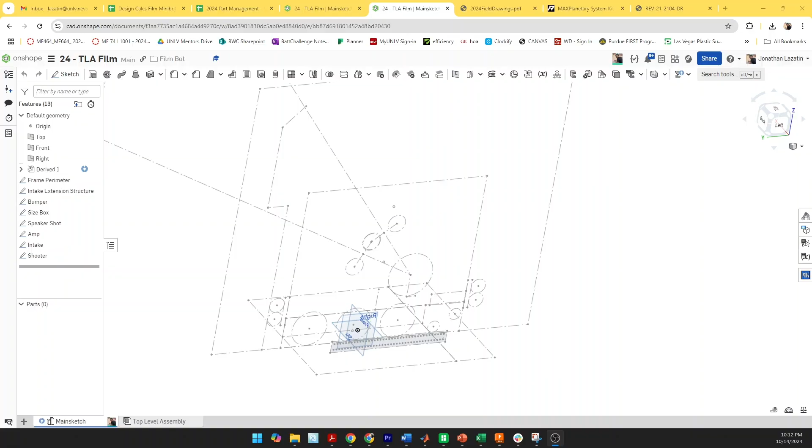Alright, so we're going to start doing mechanism design specifically for the shooter subsystem now. It's going to be an arm shooter. If you remember, we had that circle design for the sprocket.

I'm going to create a new document in my folder called 24C arm. B I'm going to reserve for bumper, so I'm going to move up to C for my subsystem.

Now once that's loaded, I'm going to start deriving the sketches from both my main sketch and the drive sketch stuff that I need. First, I'm going to go into my folder for Minibot design, and then the special film one that I created. I'm going to go into the drive.

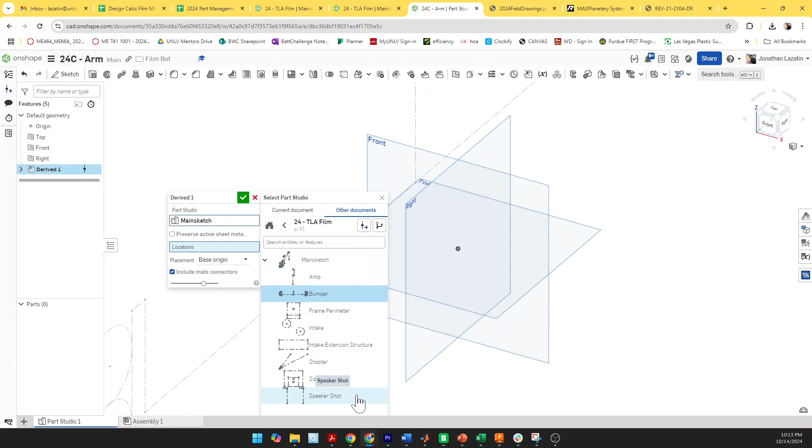I have to create a new version of it, and so I'm going to look for the sketches for the bumpers and the shooter and the size box, because those will kind of be important to the part that I'm looking at.

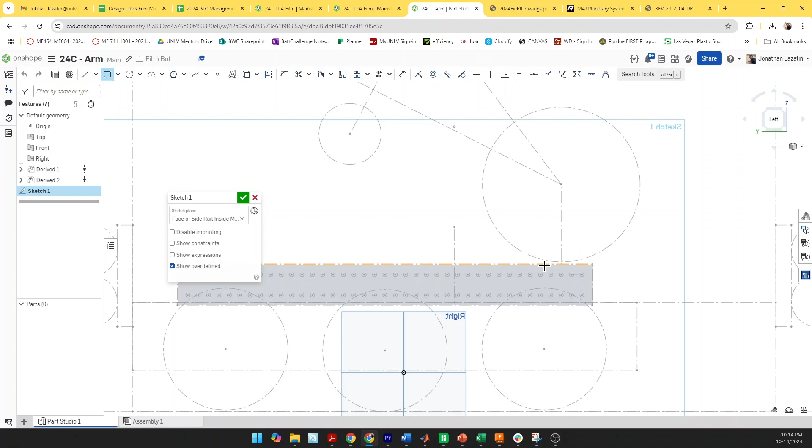Alright, so now I have my mounting rail position here. This is the inside of the mounting rail. So I'm going to do a sketch on that plane. I'm going to create a tube that centers on this pivot point that I have for my shooter.

So I'm going to make that equal so that it is also 2 inches. I'm going to look for the center mark of this rectangle, and I'm going to make that incident to the center line that I have for my pivot point. This is my pivot point here.

And I want this distance to be about, I want to have like at least an inch away from the pivot point, so I have enough material for the hole that's going to be there for the dead axle. Let's look at this height real quick - it's actually just under 5 inches.

So actually what I'm going to do is I am going to just measure the height to be 5 inches. That way this whole pattern offset will be kind of like a normal offset. So I got that, that's 5 inches.

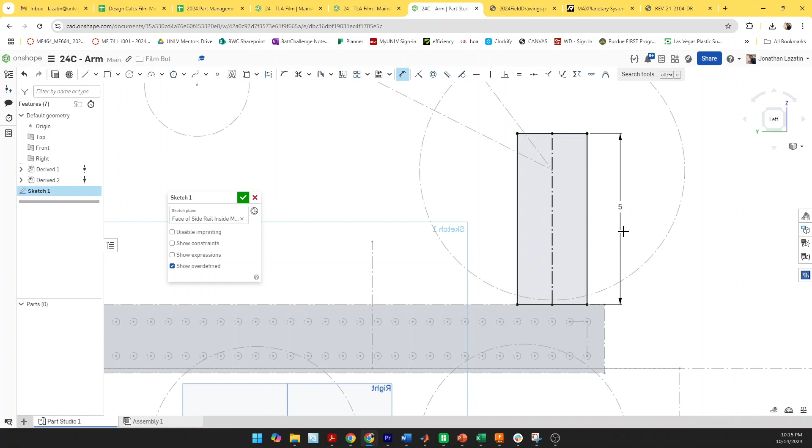And then I'm going to create a hole exactly where this pivot point is going to live. When I machine this, I'm not going to actually care too much how big this hole is. It just needs to be big enough to fit the fastener that's going to hold the shaft. So I'm going to make this something like 0.5 inches.

Okay, now I got my sketch. I'm going to go ahead and extrude that. And then I look at it - it's going the wrong way, so I'm going to flip it to go above the tube.

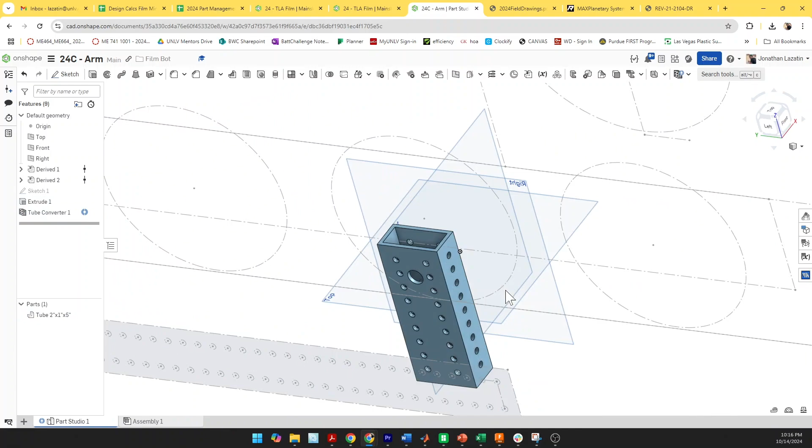And then I'm going to use my tube converter tool to make that into a regular hole patterned tube. So now I have my hole pattern.

Next, I'm going to design a gusset that holds this tube to the side rails that are mounted on top of the drivetrain. So I'm going to select this face, and then I'm going to make a sketch on it, and then I'm going to do a couple of different hole patterns.

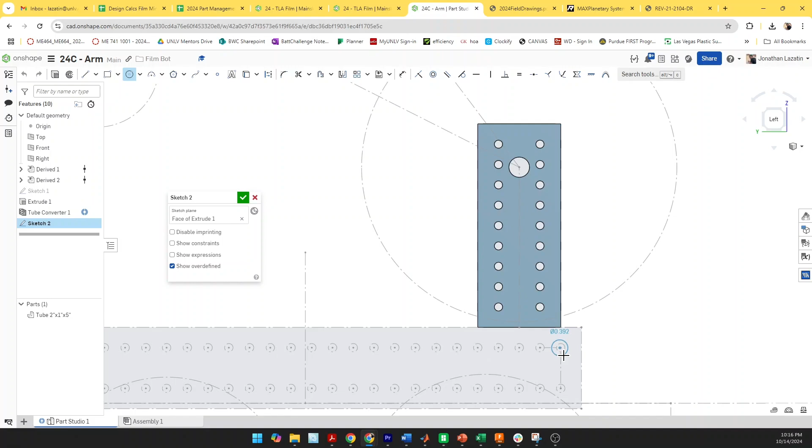I'm going to do one at the bottom that's going to start at this bottom corner, and I'm going to do another one at the corner of the vertical tube. I'm going to hole pattern this so it goes 2 across and 4 up. Change that to 0.5 so it matches my spacing.

And on this one, I'm going to go to the left, and we'll go about, I think it's 7 across. Change this spacing to 0.5 as well. Oh, not 35. And then this direction we're going to go 2.

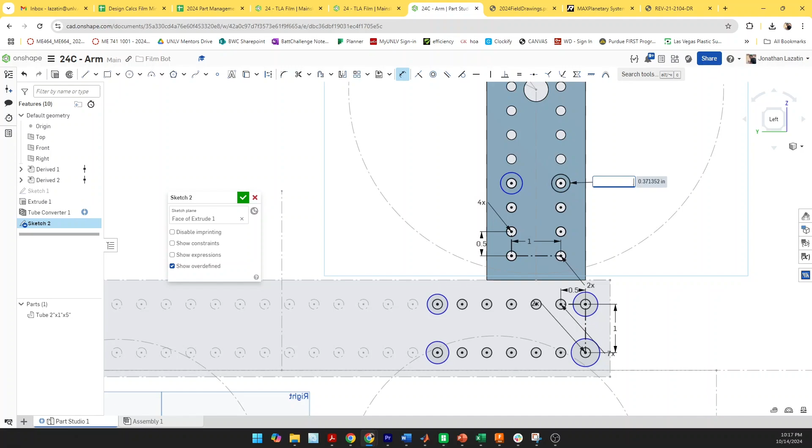Now I'm going to create the corners of my gusset, so I am going to create circles at each of the corners. Now I want all these to be 0.75 inches, so I'm going to dimension one to 0.75. And then what I'm going to do is select all of them so they highlight orange, so they're all selected. Then I'm going to press E for equality, and that's going to force them all to be equal to each other, applying the equality constraint to all of them.

Next, I'm going to create a bunch of lines that touch each of the outer circles here to create the profile of my gusset, using tangent constraints to lock in all of the lines so that they are just touching those circles at one point. Let's try that again.

And sometimes when you're going fast, it locks in additional constraints that you don't mean to, so you just Control Z a couple times, back up, and then try again.

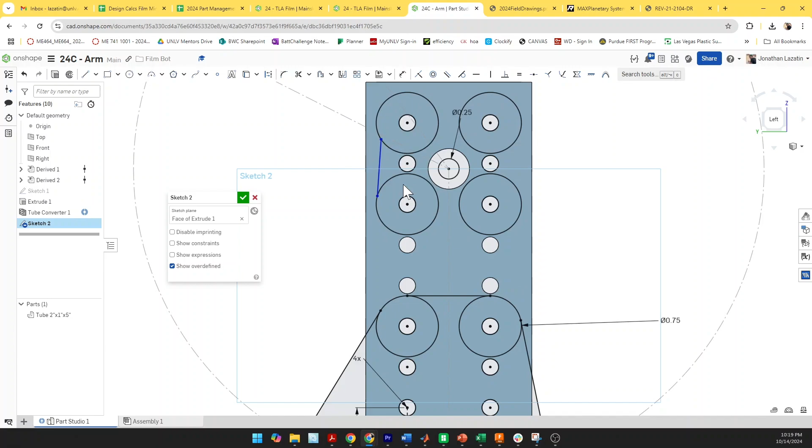Now I'm going to create a gusset, or a plate, that centers the hole here. Because we get the tubes and pattern holes done by the mechanical engineering shops, I don't typically like to ask them to do custom holes in random spots. So what I'll do is design a plate that mounts to the side of the tube to get my precise hole position, which we can do in-house on the OMIO. I'll drill a hole like the large one in the center by hand on the drill press, just to allow enough room for a pass-through so I can use the plate as my actual centering hole.

Same gusset design philosophy here: do all of my hole pattern, my corner holes for the exterior of the gusset, then use lines and tangent constraints to make all of that hit at one place at each of the circles. Both of these are going to be 1/4 inch gusset plates.

So I extrude them to a 1/4 inch, and now I have my gussets. This is actually for the arm pivoting position, and this is kind of all I need. I'm going to go ahead and rename my part studio and my assembly to my naming convention: 24C arm, and then arm assemb for assembly.

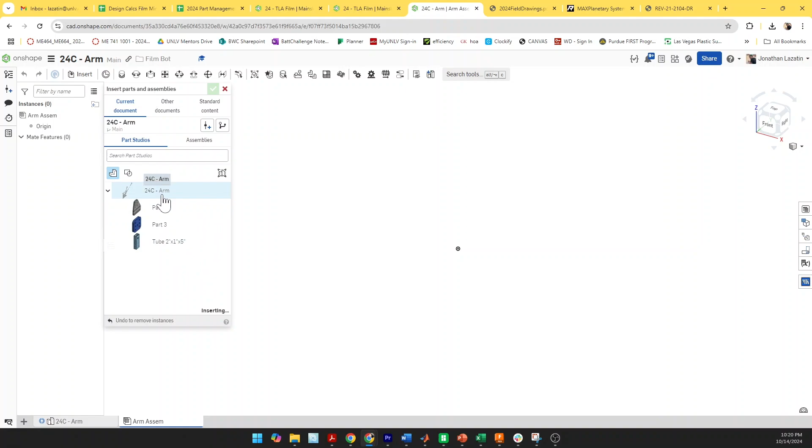Now I'm going to go to the assembly and drop in the parts that I currently have to start creating my arm assembly. So I'm going to drop in all the parts, and if I press the green check mark and not drag around the screen, it'll drop it in exactly where it is in the part studio.

So what I'm going to do then is lock these two together by grouping them. This blue plate I actually want to be on the inside of my assembly, so I'm going to move that to the other side. Next, I know that from interior to interior of the mounting rails on the side of the drivetrain is 22.5 inches.

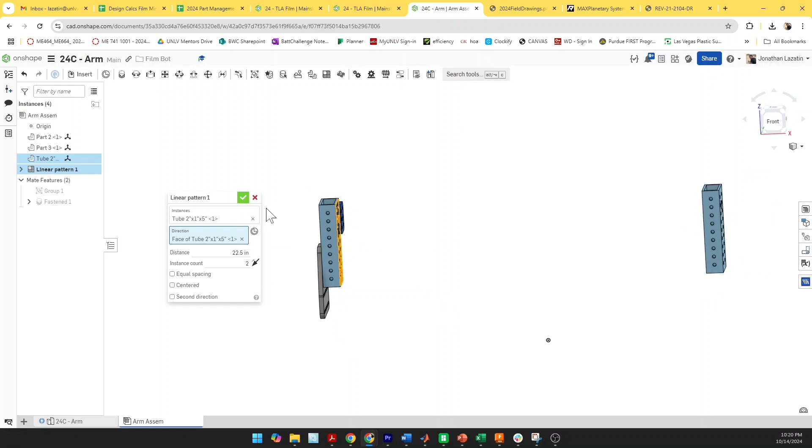So I'm going to use a linear pattern here to move these to about 22.5 so that they match that dimension. I'll put 22.5 here to see where it's at. This isn't exact—it'll be a bit more than that based on the tube width—but instead of doing the math, I'm just going to drop it in first, look how far apart it is, and then adjust.

So these are 21.5, so I'm going to add an inch to this, so it's 23.5. Now it should be 22.5 on the interior face, which matches the drivetrain. Then I'm going to copy this over so I can mount it on the other side as well.

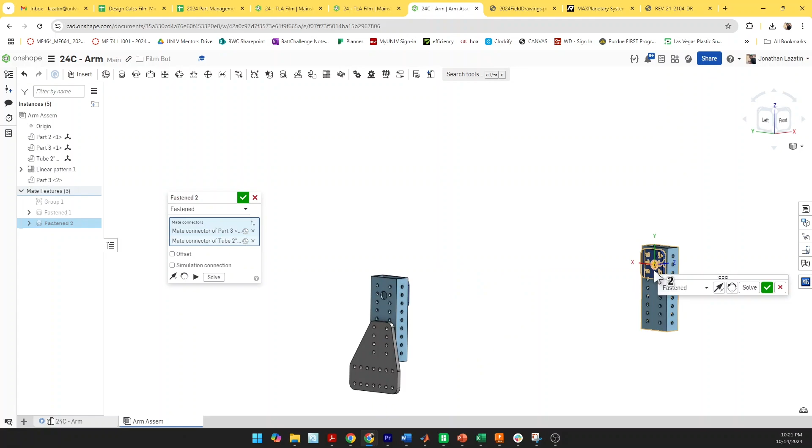And then I'm going to do a linear pattern with these gussets so I don't have to mate them over again. I'm going to go in the direction of that edge, and then go to the other side. Actually, I'm just going to go to the other side of this one tube.

So 1.25 gets me to the other side of the tube, because the plate is 1/4 inch and it needs to travel an inch plus that 1/4 inch to account for the thickness of the plate.

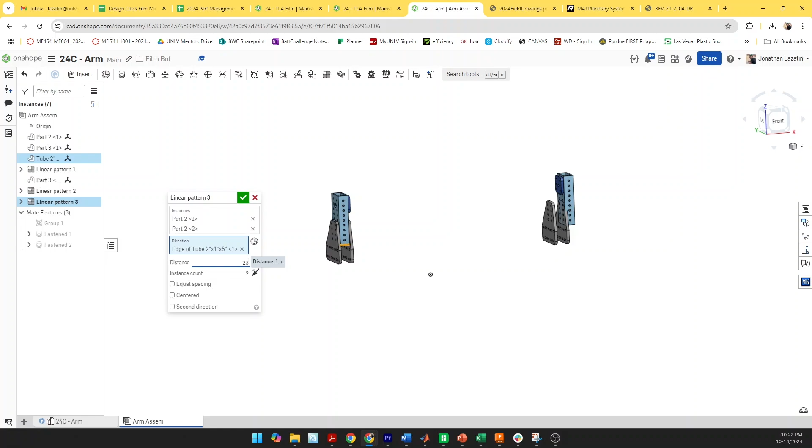Then I'm going to select both of these, same thing, go in that horizontal direction, and now about 22 inches. I need a little bit more, 22.5, still a little more, 23.5. Cool, so that looks like it's just about right, good.

So now I have the plates that are holding it to the drivetrain. This is 22 inches in between these plates. So now I'm going to create a hex shaft using MKCAD to 22 inches.

So I'm going to search up hex shaft—1/2 inch hex shaft is what we use. It's going to be a bolt and washer situation, but we're not going to include that in the hardware here. I'll make the shaft 22 inches and mate it to the inner circle. Boom, boom. Cool, and now I have my shaft that goes across the arm for my dead axle.

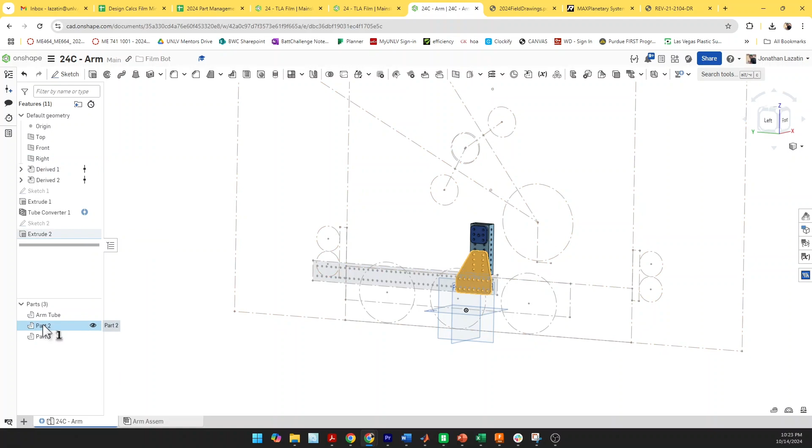Cool, so we just have 3 parts here. We're going to rename them just to make sure we have a name for them when we do it in the part management system. This is going to be the arm tube, this is going to be the arm gusset, and then this is going to be the arm shaft centering plate.

Now that we have this much of the assembly, I think I want to see what it looks like in the top level assembly. So I'm going to create a version of it and go to my top level assembly. Oh, I haven't dropped in my drivetrain yet, so I'm going to start with that.

I'm going to go to other documents and look in my folder for the drive, 248 drive. I'm going to go to assemblies and then select my drive assembly, and that's going to import in.

Cool, and now I'm going to fix it. I'm going to select the part and create a fix, and that's going to make it so it doesn't move my assembly when I drag things around.

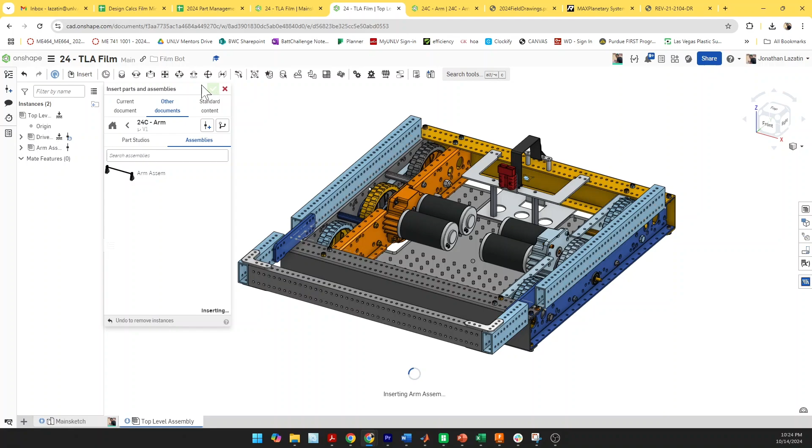Now I'm going to go to my arm, go to assemblies, and drop the arm assembly in. Again, I'm not going to drag it around the screen, I'm going to drop it in because it's going to put it right where it's designed. Since we did all of our reference drawings, it'll be right where it needs to be when I drop it in.

Okay, I remember there's this intake gusset here, and I'm looking at this interface. The outer plate is fine, but this inner plate is actually not working right with my intake gusset. So I'm going to change that by going back into my arm.

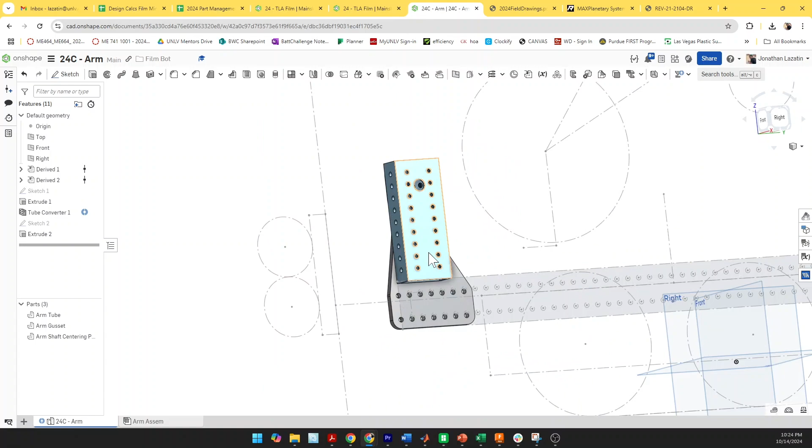I'm going to create another sketch on the inside of this tube and create a new gusset specifically for this purpose here. So I'm going to use the same kind of gusset technique. I'm going to use 1 hole here, and I know that the intake gusset's about 3 holes in, so I'm going to go 5 holes out to make sure I have clearance from that.

I'm going to do a linear pattern here. I'm going to only go 3 up on this one, and then 3 across on this one, and that should give me plenty of stiffness for that tube.

I'm going to do my corner circles, and then I'm going to make all of these equal to each other. And then I'm going to make it equal to the outer circle of the gusset, which is already the 0.75, so I didn't have to dimension anything here.

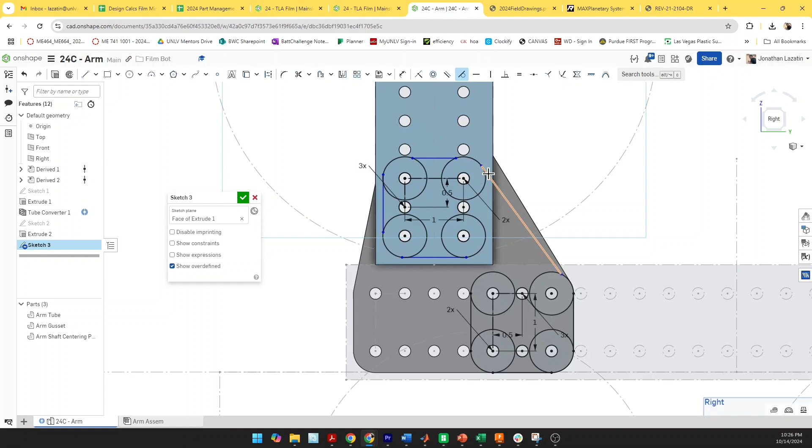Now I'm going to go and create all of my lines to create the gusset contour, making sure they're all touching the circles that I've created. I'm going to do the tangent constraint on all of these lines. Oh, got an extra one in there.

Okay, and then for this corner, I'm actually just going to use an arc. So I'm going to make an arc touch both of these inner circles, and then make them tangent to each of the circles, and that's going to create this curve for me here. And that is cool, so I did the whole thing without any dimensions.

It's going to be another 1/4 inch plate. They're all constraints. And this is going to be the inner arm gusset.

And so now I have to modify my assembly. So I have to take these out of these linear patterns. Let's go ahead and remove this guy.

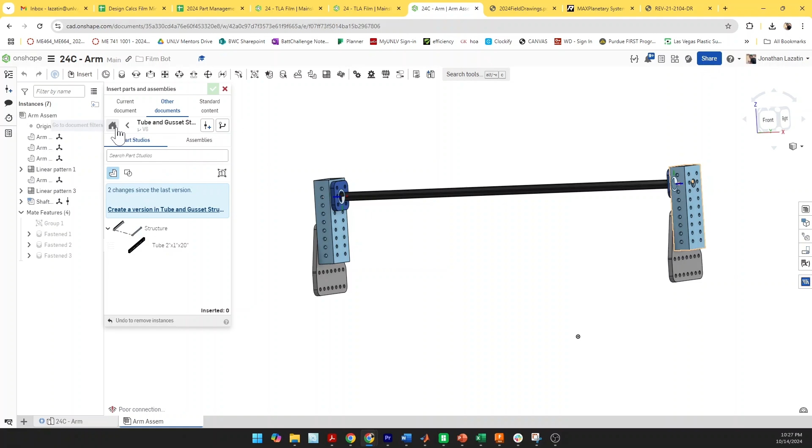I'm going to change, let's see, let's go into my current part studio, get my inner arm gusset. Let's mount this. This 3rd hole is at the top of that guy. Oh, everything moved, that means it's not fixed.

Let's go back real quick. Let's go ahead and click the first part that we dropped in and fix it so this whole thing doesn't move. All right, and now I'm going to do the mate from this hole.

3rd hole up to the 3rd hole up here. And that's all lined up now.

Now I need to change my linear pattern offsets so that the first plate that we designed is on the outside. So I'm going to delete this missing one, and then change this, add an inch to it to bring it to the outside. Oh, an inch and a quarter.

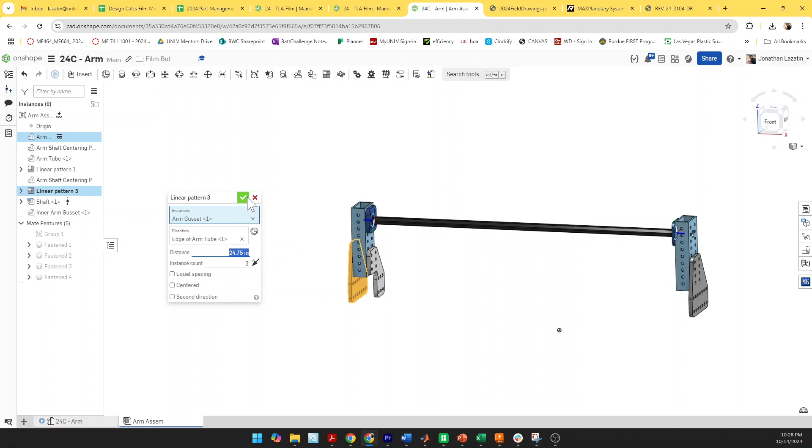There we go. Now I'm going to do another linear pattern of this interior guy here, going in the direction of that edge. And then this should be something like 21 and a half, or 21 and a quarter, 22 and a quarter. There we go.

Cool, so now that looks good. Create a new version of that, and let's confirm in the top level assembly that it actually doesn't interfere with the intake gusset. So once I get that blue circle, I can update that arm. Now we see that it doesn't interfere anymore, so we're good there.

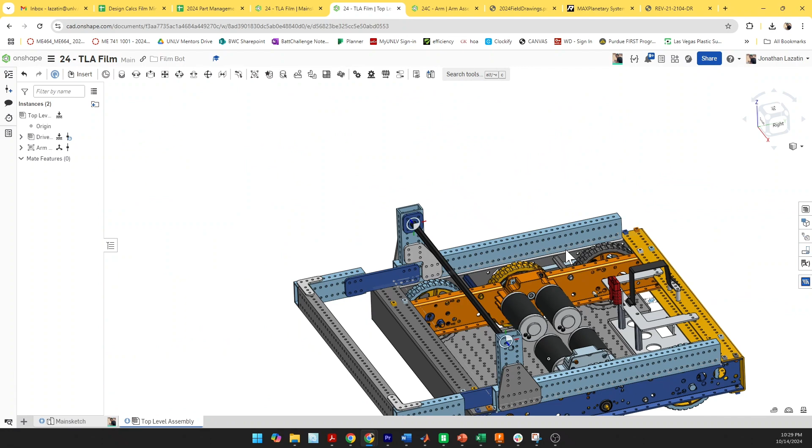All right, since the arm is not a super complex assembly, I'm actually going to include the shooter in this. I'm going to rename this arm shooter, just because the part studio is going to be relatively small, so we don't necessarily have to worry about crazy load times here because there are not going to be so many parts.

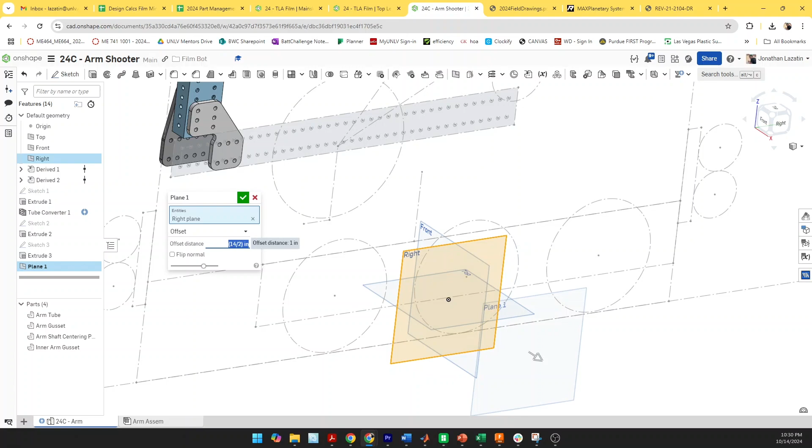So what I'm going to do is create a plane off the sketch. I know the node is about 14 inches long, so I'm going to create a plane that's 14 divided by 2, so 7 inches out from the center, and this is going to be where the rail that holds the shooter together is going to live. Now I could do that at 14 and a half if I want to give it a little bit more room, but I'm just going to do 14 as a round number. Again, this is just primarily for showing how to do this.

Then I'm going to create a box around this kind of center line of my shooter here. So then I'm going to create a center line that goes from the center of that top line segment to the center of the bottom line segment. I'm going to make this whole line coincident to that center line, and then I'm going to do a couple of equality constraints here to make those 2 inches.

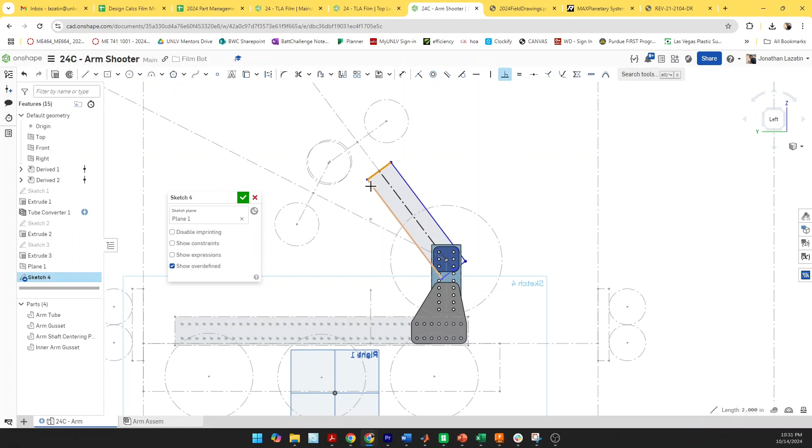I'm going to make this perpendicular and this perpendicular. Cool, so now this tube is a 2-inch rectangle centered on that line here.

I do want about an inch away from this to make sure that I have enough room for my hole for the pivoting, and then I'm going to make this a round number at 9. So I'm going to go ahead and extrude that, and it's going the wrong way, so I'm going to flip it the other way so that I have the full 14 inches between each of the tubes.

And then on the sketch that I just created, I'm going to add another circle centered at my centering plate circle, and I'm going to make that 1 1/8 because that's going to be the size to allow for a bearing to get fit in there.

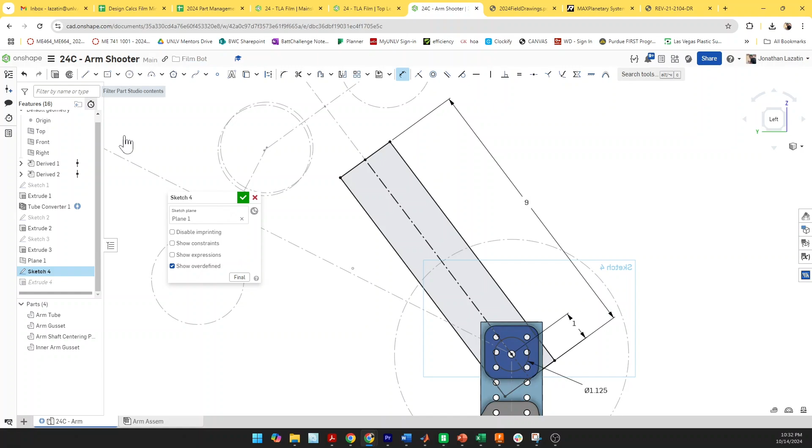So there we go, and then tube converter. Cool, and then I'm going to make this a 16th inch tube because since it's rotating and we're going to use a motor to rotate that, we want it to be as light as possible. So I'm just going to use a thinner tube here.

And actually I wanted to design a plate here because I know that for our sprockets, we'll have holes above and below the main bearing hole. So what I'm actually going to do is extend this tube so that I can have holes on the other side. There's an automatic clearance feature in tube converter that makes it so that they don't create holes near any other features, so that's what's being activated now.

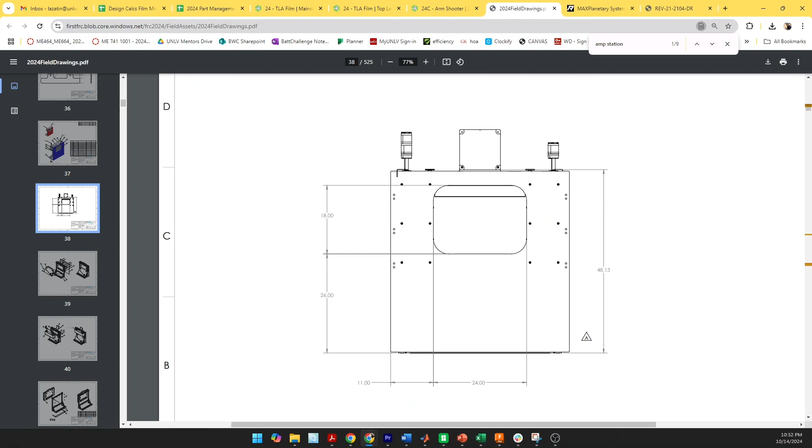So I'm just going to show here, I'm going to go to West Coast Products. I'm going to look for a 35 chain sprocket, and then show you the hole pattern that I'm talking about. Remember, I sized this for a 60 tooth sprocket, so I'm going to look for the 60 tooth sprocket here.

So I'm going to just bump this out by 1/2 inch. I'm going to keep that at 9. And now I should have holes on either side of that bearing hole. There we go, cool. So I have my holes ready for my sprocket mounting bearing block.

So I am going to create another plate that's going to live here. It's going to have the same 1 1/8 interior hole. These are going to be all equal to the holes on the tube. And then I'm going to create another set of circles on the corners, and those are going to be 0.75.

I'm going to dimension this guy 0.75. Select all of them, and then press E for equal. Oh, missed one, try that again. I'm going to do my equality straight there.

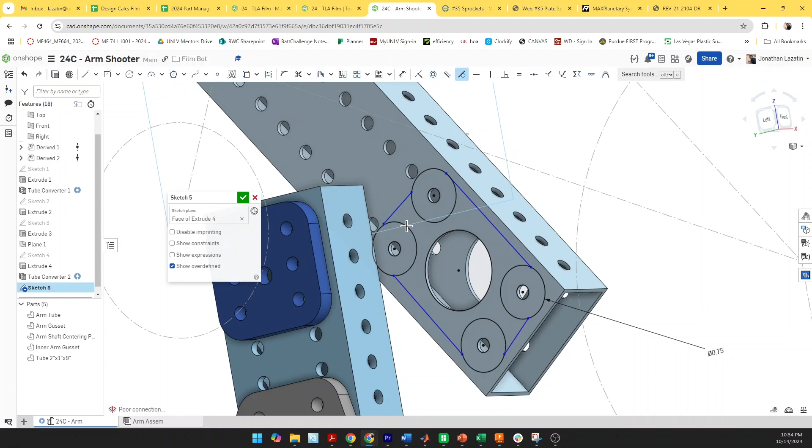And then I'm going to add my lines to each of the circles, and then tangent constraint, touch all of the lines. It looks like that one actually isn't touching the top left circle, so I'm going to use the coincident constraint, and then touch the very tip of the line and then the circle, and it's going to connect them. Then I'm going to continue on with my tangents.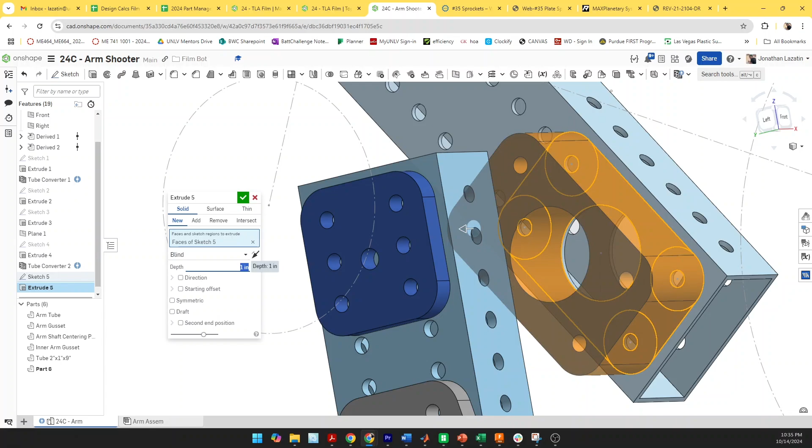This is going to be another 1/4 inch gusset. Boom, boom. All right, so now I have a mounting plate for my bearings and for my sprocket. Cool, and it matches the angle for my shooter.

All right, so next we are going to design, let's go with the shooter plate next. I'm going to start on the outer face of my tube, create a new sketch, and then I'm going to get the center of each of these larger circles that are supposed to be my shooter wheels. And then this line, if I track this line, it goes to this lower section here.

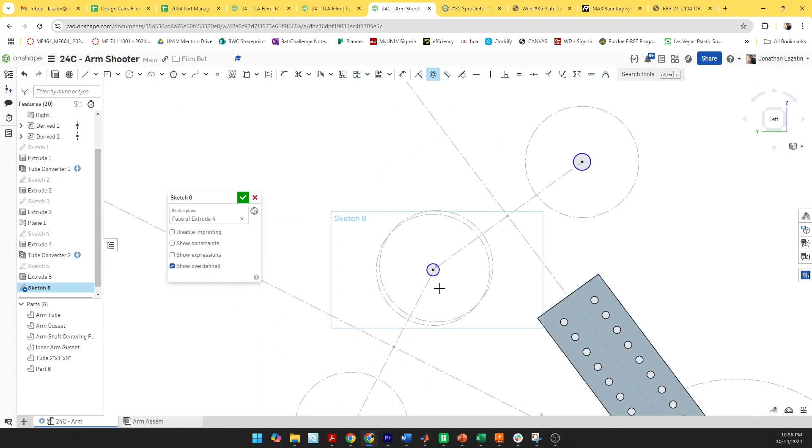So that is where I want to make my concentric mate. Let's check that's the right one. And then these are going to be, let's see, if I was going to do a dead axle, I'd do a 1/4 inch, but actually I'm going to make this a live axle just to kind of show you how that works. It'll be a little bit easier of a design, and then it'll allow me to tuck my motors in. But we have to just make sure that it's well supported then.

So that's going to be 1 1/8 because that's a bearing hole. And then I'm going to make another hole out here that's going to be for the motor mounting. I'm going to start by making a center hole that's 0.65. The shaft is 0.5. 0.65 should get us enough clearance around the shaft so that it can spin freely through the hole without touching anything on the plate. Then I'm going to draw a random rectangle around it.

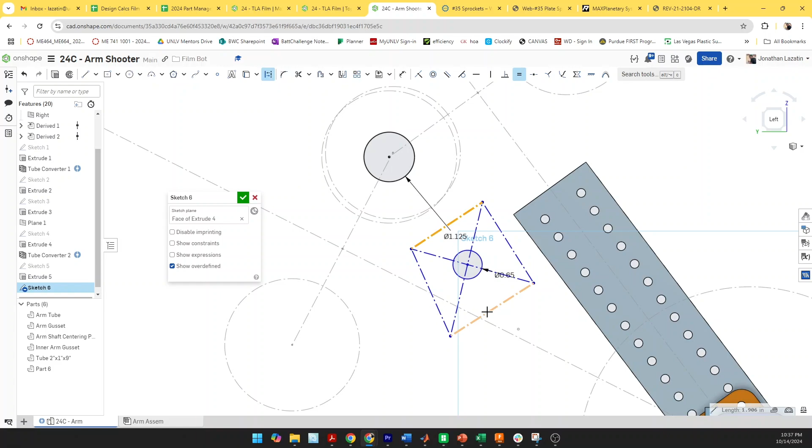And then these are all construction lines. I'm going to cross them over because you'll see I'm going to create like a perfect square around this circle here. So I'm going to make those lines that are crossing over centered on that hole. And then I'm going to make these equal, and then I'm going to make the corner perpendicular.

Cool, and from here, so this is the gearbox that I'm going to use for this. It has one side's 2 inches, the other side's 2.44. So I'm going to use those numbers. The side that's going to be, I'm going to make this parallel to the tube. And then the side that's facing the tube, I want that to be the 2.44 side, and the other side I'm going to make that 2.

Cool, and then I'm going to do a center line here, and this is where I'm going to use my design calc, that line from the center of that hole to the center of the gearbox, because it's going to be center shaft to center shaft. The plate's going to have about 2 inch material, or 2 inches circle around the center shaft.

For the design calcs, this is going to be for my shooter. It's going to be a pitch of 5 millimeters, and then an 18 tooth pulley is kind of like the smallest we typically work with, so I'm going to use that as a starting point. We have some 48 tooth belts, so that's going to get me a center of 2.95. Let's see if that works here. I just want to make sure it doesn't make the gearbox hit the roller. So we're about at 2.9 now.

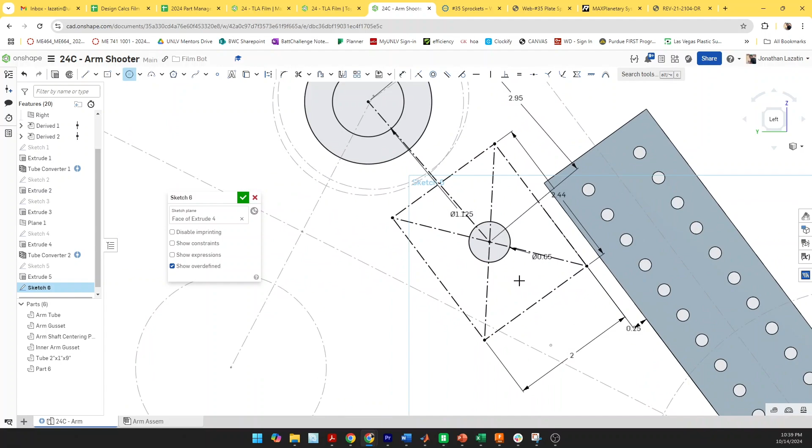So 2.95, and that gets us so that gearbox does not touch the wheel. I should be okay there. And then I'm going to space this off by about a quarter inch. There we go, and then that's going to lock in. It's going to keep the gearbox close to the tube, so it's not a big weight far away from the tube, but make sure there's space between the tube and the gearbox.

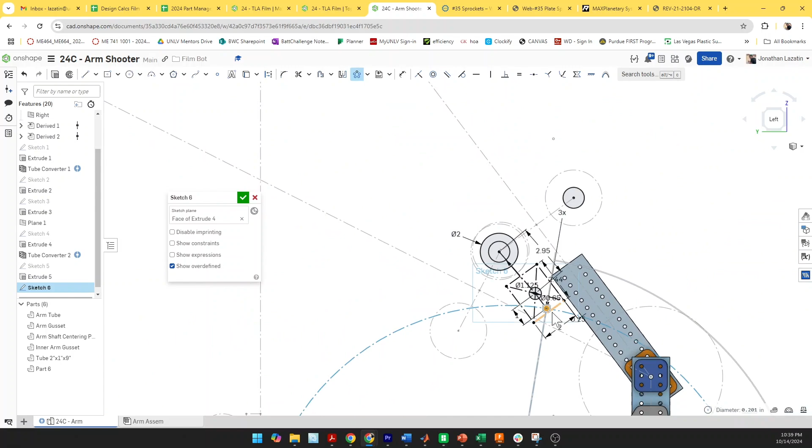I also know that the gearboxes have a mounting hole that's aligned center to the 2 inch face, and it's a 2 inch diameter mounting hole circle, so it's going to be 1 inch away from the center. Then the hole size is the same as the hole size we've been using for a number 10, it's 0.201. Then I'm going to do a circle pattern here, but instead of doing 3, I'm actually going to do 2, and it's just going to bring that circle to the other side.

So it's kind of like doing a mirror, but when you don't have a mirror line, that's another way you can mirror something.

Okay, now I'm going to finish off this plate by capturing the other bearing hole. I'm going to do a line across, and then I'm going to do the mounting holes. I'm going to go about 3 inches, so 1, 2, and 3. Centering all of those with an equality constraint, select all of these and make them equal to the first one.

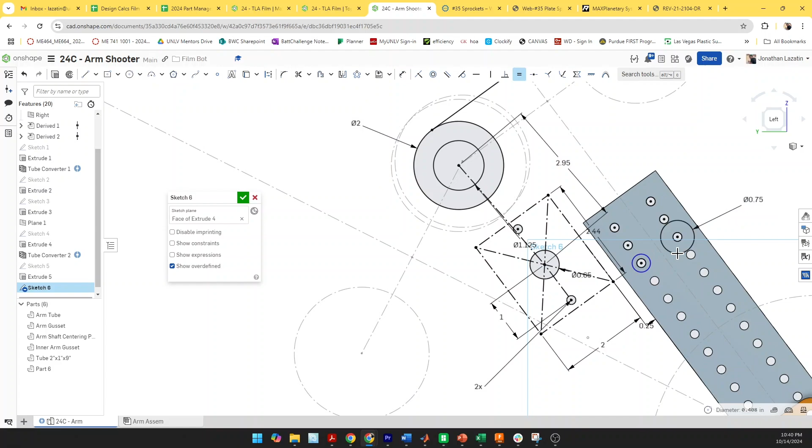And then I'm going to get the back corner ones because those are the ones I'm going to use. Make these 0.75. These two are equal, and then this one's also going to be that 0.75 as well. Make that equal. Cool. Now I'm going to create some lines.

That's going to be tangent to that. That's going to connect, and that's going to connect, and then one more. And then it's going to turn gray because that means it's a closed shape. There you go. And then tangents all around. Once all the lines turn black, I know that it's fully constrained with very few dimensions.

Gonna extrude it to a quarter inch. Boom, so now I have a plate with some mounting holes for a motor. This is gonna be the shooter plate, or sorry, this is the sprocket bearing block, and then this other part 7, that's gonna change to the shooter plate. Cool.

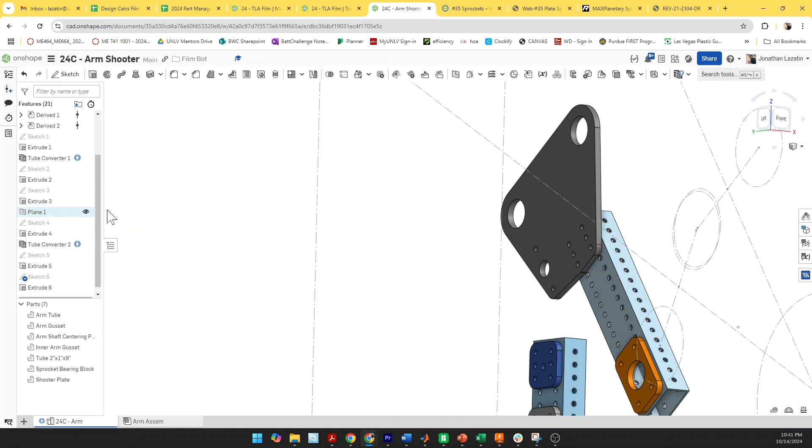All right, so next, before we drop this to assembly, I want to create a plate that goes across the entire shooter. So I'm going to do a sketch on the short side of the tube, and I'm going to make some circles for the mounting. I'm not going to do the whole linear pattern because I don't want to fasten all of those holes. Ideally you would do the entire side of this, but I'm just going to select some holes.

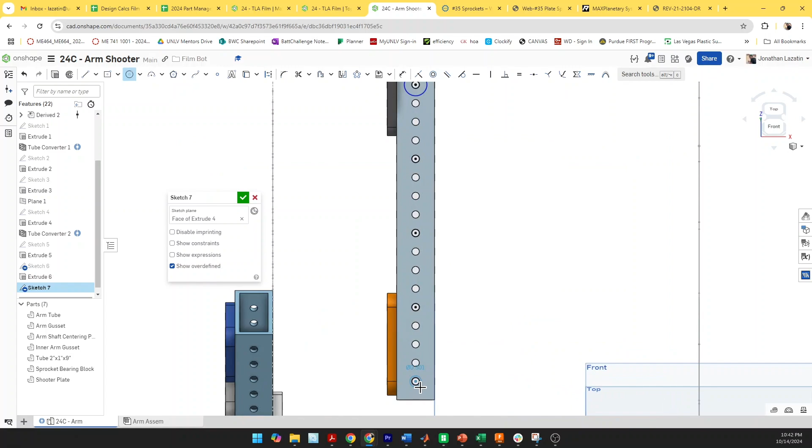So that when I put it on the CNC router, it doesn't take forever drilling a bunch of holes. We're only going to space them out so that we'll only use these 5 on each side. Then I'm going to get the outside holes, those are going to be 0.75.

There you go. And then I'm going to do some lines that go from the large hole to create the outer edge of my plate. And then from here, I'm going to go from the top edge to actually just this, like the center of the part studio. So I'll make these all tangent. Boom, boom, boom, boom.

Tangent, tangent, tangent, tangent. Now I'm going to use a coincident constraint, and I'm going to touch the center line of the part studio and click the end of the line segment, and that's going to bring them all the way back to each other so that it goes all the way to the center line.

Now I'm going to use the mirror tool, click the center line, and then click all of the parts in this left side of the sketch, and that's going to mirror all of these parts to the other side. I gotta get the actual outer contour, not just the center hole. So, boom, boom. Now I should have them on the other side. Good.

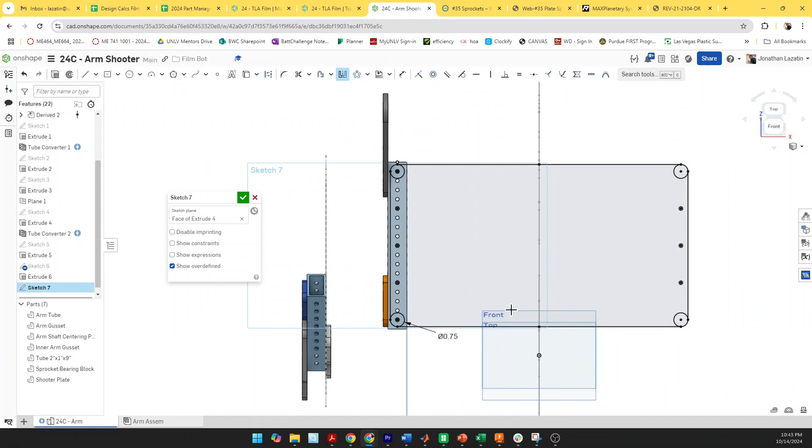Let's go ahead and extrude that 0.25.

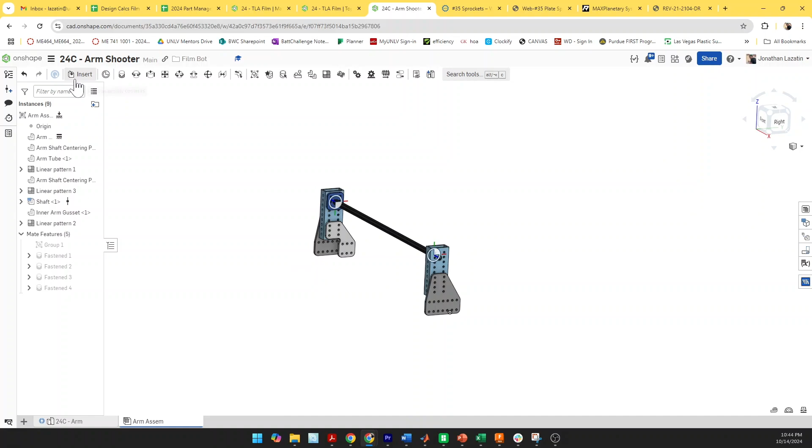So I'm going to go back into my part studio, go to that sketch I just did, and change the sketch plane. I'll cross that out and select the bottom sketch plane. You see it drops the sketch features down, but it messed up some of the lines during the conversion from top side to bottom side, which is okay. I'm just going to delete those and redo them.

So here: tangent, tangent, mirror, center line, mirror, tangent. Look at the tangent again. All right, cool, so now I have my plate.

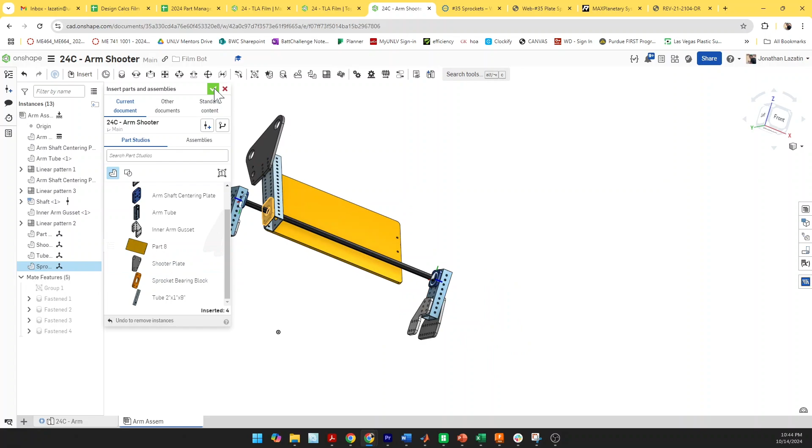I'm going to drop in the new parts that I just made. Get the tube, I still need the sprocket, block. There you go, cool. So now it's going to start forming my shooter.

I'm going to do a planar mate that mates the center of this plate, the vertical plane that goes up through the center, to the vertical plane that goes through the center of that shaft. And that's going to make this entire thing centered in the assembly.

Next, I'm going to mate these two circles together. Okay, and then the mounting hole for the bearing block gets mated together. And then I'm going to do the shooter mounting to the front of the shooter. Okay, that's all mounted together now.

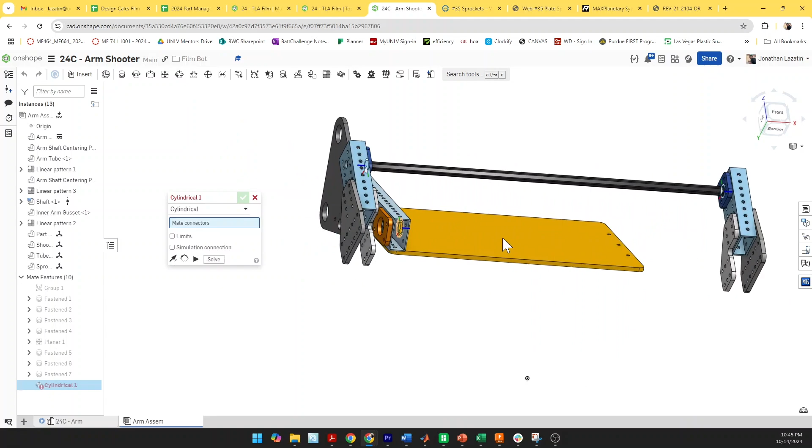Next, I'm going to do a cylindrical mate from the circle of my bearing block to the end of the shaft, which is going to center the bearing block there. So now it's all spinning around the same axis and centered on that shaft.

So now I'm just going to create copies of all these parts because I need them on the other side too. I'm going to mate the bottom of this tube to the corner of—I'm missing the hole there, but I'll fix that later. I can use the circle as my mounting reference, the circular edge, because it still has the same center, to the center of that tube circle.

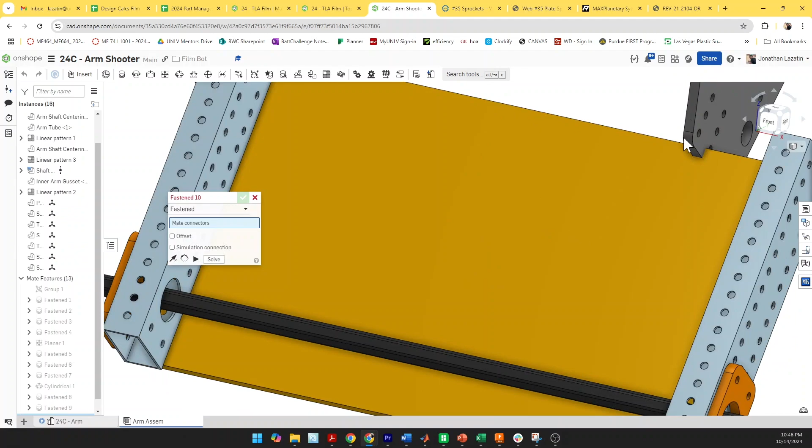Good, and then I can mount the bearing block circles together. And then this plate's actually going to flip because I need a motor for the top side and a motor for the bottom side. So I'm going to mate it so that the motor mounting hole flips to the other side.

And as you see, as it flipped, it wasn't perfectly aligned, so I can't use a fastener mate. I'm going to use a revolute, which will allow me to pivot this plate a little bit while it's still centered on the one hole that we mated.

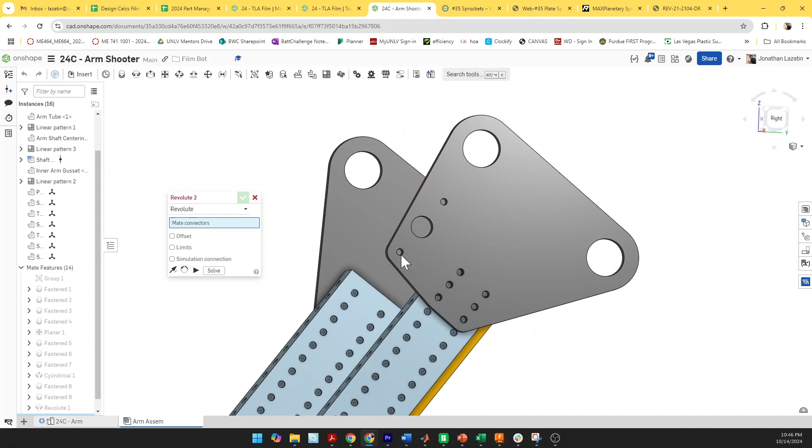Now I'm going to get a couple of the holes kind of lined up, and then I'm going to use a cylindrical mate to match the centers of the second holes. So it's hole, hole—now those are lined up. So yeah, there you go. A revolute and a cylindrical mate can get you the lineup you need when you have something that mounts to holes that isn't quite lining up when you put it in the assembly.

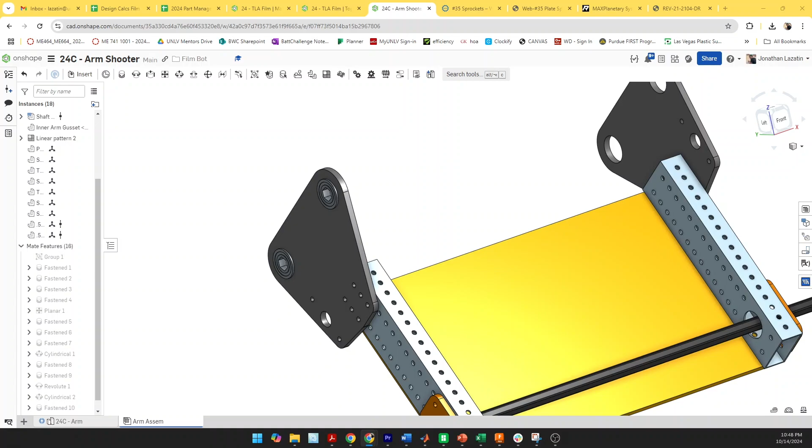Actually go to MKCad. I'm going to look for the sprocket that's going to go on this side. So sprocket, I'm using a 25-chain—sorry, 35 chain. I'll scroll down, numbers increasing, 35 chain. I'm going to use the West Coast Products one, the WCP X-spline bore. So it's going to drop that in for me.

Now I'm going to mate this center circle here to the center circle here. It looks like it's intersecting, so I'm going to flip it. Oh yeah, so flip it to the outside. And then check mark, okay.

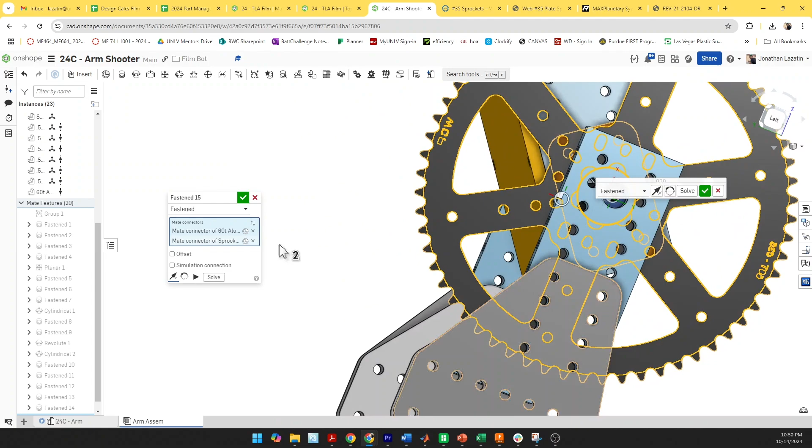So now my circles aren't lined up here for the mounting position, so I don't love that. I'm actually going to change this to a revolute mate so I could spin it around. And then I'm going to grab a cylindrical mate, and remember we're going to go up, everything's rotating with me.

So these long holes are what's going to mount to the holes that I currently have on my tube. I'm going to go to the outer side of the long hole, pick the circle that I have, and that's going to rotate it. Oh, it's actually offset 45. I need to go to the other side hole, so I'm going to take that.

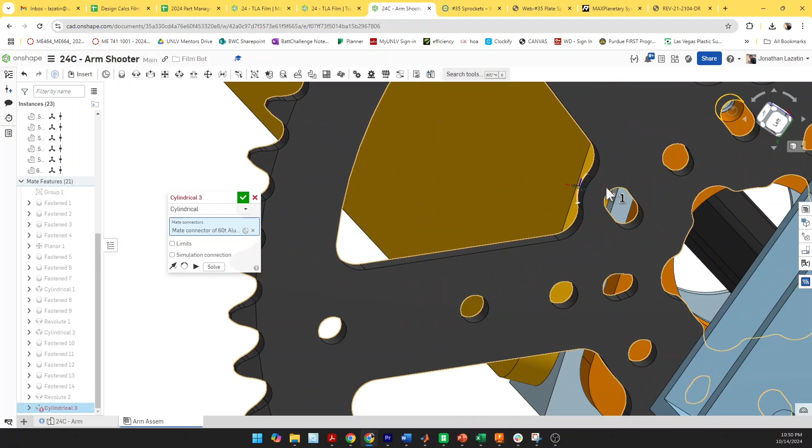I'm going to remove the mate to the sprocket plate and remate it. Oh, that's actually still a sprocket. I need to do the other hole of this orange plate here, and I can't really see the hole, so I'm going to look from the back side because I can see it from the pass through there. So like that hole. Okay, and now it should be lined up.

There you go. So now we have our mounting pattern. All 4 holes have access to the sprocket, so we can mount it pretty rigidly. This whole thing's flipped over. I need to flip back around, and that's the position it would be for its shooting position.

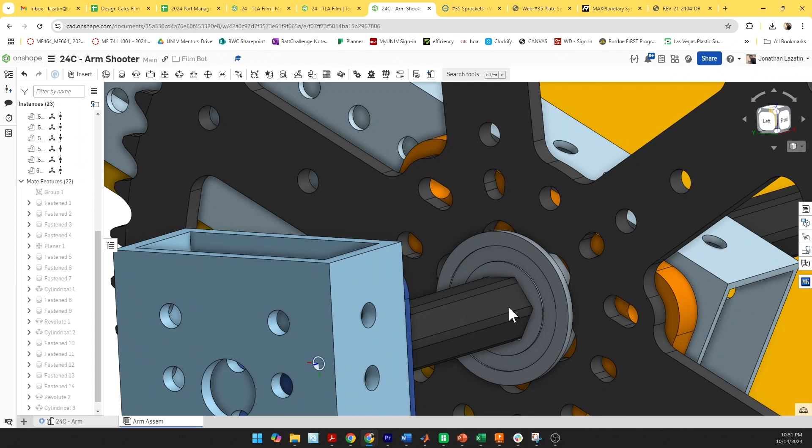So now this bearing is going to go into this bearing block here. There we go. So now that shooter assembly can pivot around that sprocket as a chain that will be mounted down by the drivetrain. Can spin it. So this thing can move up and down to get my shooter angle.

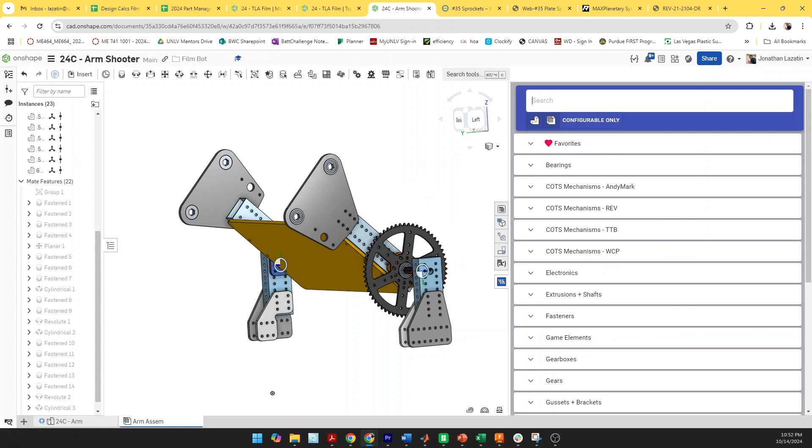Next, let's go ahead and bring in our motor. So I'm going to search for max planetary. That's the gearbox we're going to be using, and I actually just want a 1-to-1 ratio. We're going to be using a Neo, and then let's do a 2-inch shaft. Go ahead and insert that.

Once that drops in, we can do a revolute mate, so change that to revolute. Then we're going to click the center circle of this gearbox assembly, and then use the circle of my mounting plate. Flip that around, and then I'm going to do a parallel mate from the long edge.

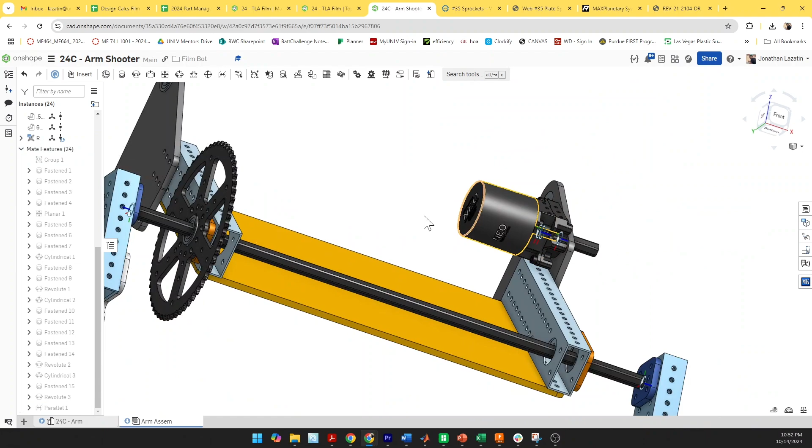Remember, we wanted the 2.44 edge. I'm going to do parallel this face and the face of the tube, and that will make them so that they're parallel to each other, so that they're not touching. See there?

All right, and then I'm going to grab that same part from my feature tree on the left, and I'm going to Control C, Control V. It's going to drop in another one. I'm going to do revolute mate again, change this to rev. There we go. Circle of the gearbox, circle of the mounting hole. Boom. Cool. Flip that over.

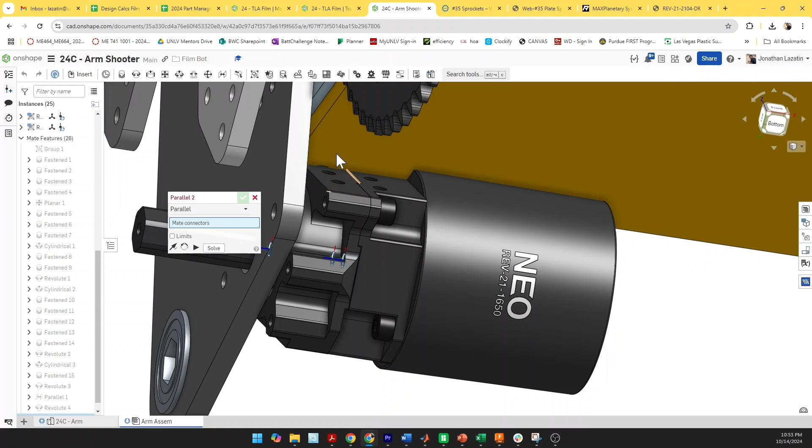All right, and then I'm going to do the same parallel mate. I see a problem here already. The plate that's underneath the shooter, the long flat one, is going to get in the way of this gearbox. It's actually going to interfere because remember, it's a 1/4-inch gap between the gearbox and the tube, and this is a 1/4-inch plate, so they're going to land right on top of each other. I'm still going to mate them to be parallel, but if I look at it, you could see that they're intersecting. Even the actual motor body touches that plate.

So this is where our constraint design style is going to help out. We're just going to go back into this. I care about this gap over here. Oh, I missed a tangent there, I'm going to redo that. Care about this 0.25 gap. I'm going to change that to 0.5 and nothing else. Everything's going to re-render, and when I go back to my assembly, I should see now that I have a gap between my motor and that plate.

So I'm good now. Next, I'm going to drop in a pulley to drive the shaft here. So I'm going to search for pulley. I'm going to use the configurable one, so I'm going to look for configurable only. It's going to be HTD configurable pulley. There we go. I'm going to make this 18.

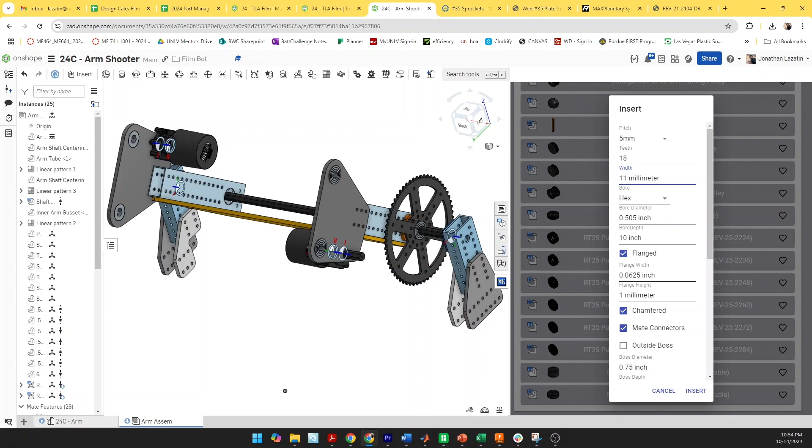We're going to use 11 millimeter because we're doing a 9 millimeter belt, so I do the 9 millimeters plus 2. The flange width I'm going to do 0.0625, and the flange height 0.2 inches. Misspelled inches there. Good. Insert. All right, so now the pulley just dropped in.

I'm going to take that, mate it to the shafts of the motor. So fastened - I'm going to do the bearing first. And I'm going to offset this by a -16th, and that's going to bring the pulley out because you want a little bit of space from your pulleys to your bearing. You'll put a spacer in between there.

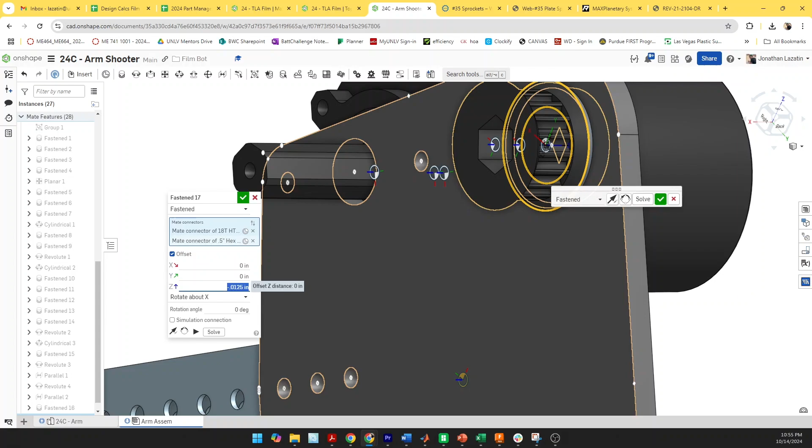Then I'm going to copy this pulley, do the same thing on the other side to the bearing hole. Good. Offset that by -0.0625, not 125, 0.0625. Good.

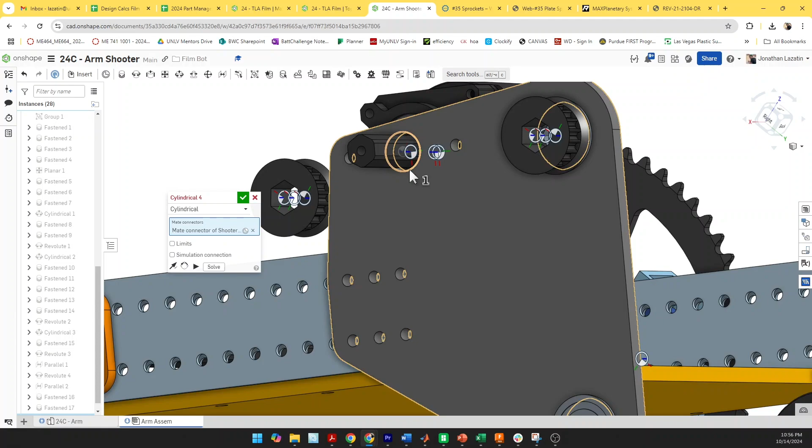Now let's do 0.0625. We're going to copy this pulley again, and we're going to put it now on the shaft side. So boom. Cylindrical mate to the shaft. And I'm doing a cylindrical mate here too, so that I could perfectly line it up with the outer pulley. You see it slides on the shaft there.

I'm going to do a planar mate from the outside of the pulley to the outside of the pulley here, and that's going to make sure that they're perfectly lined up with each other. Because the bearing's there for the shooter side, but not for the motor side, doing the 16th offset isn't going to actually be equal because they're slightly different due to the bearing being there.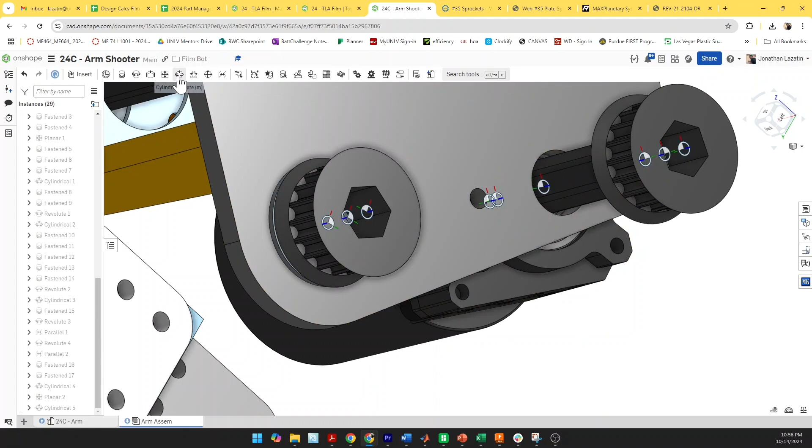So same thing, gonna do cylindrical mate there, planar mate to the faces. Boom, boom. Oop, something messed up there. Let's try that again. I'm gonna delete this planar mate. That looks fine. Okay, let's try that again. Planar mate, outer face, green check, and then we're good.

All right. Okay, so next I'm gonna make a shaft that goes from that end of the pulley to the end of the bearing there. That's going to be the effective shaft length that I need. So I'm gonna do hex. That's 17.32. I just copied that from the measurement at the bottom and pasted it in here.

You could either do, let's do shaft collar right now. Include everything and then insert. So the shaft then drops in for you. I'm gonna mate this to the outside of that bearing here. Cool, and it goes from the end of the pulley to the end, but it actually didn't put in my shaft collars, which I don't quite know why.

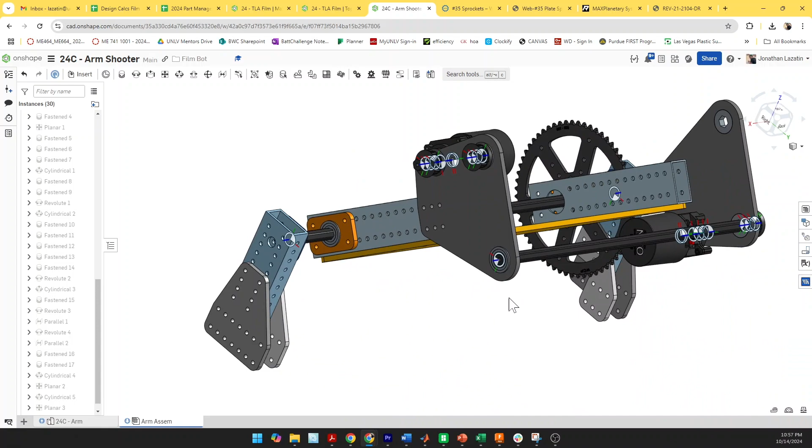So what I'm gonna do is, let me change the configuration. Let's actually do, it's actually nicer if you could do bolt and washer, it's a cleaner assembly. So let's go ahead and do bolt and washer. Let's regenerate that. And when I zoom in here, you see that it regenerates with the bolt and washer. I'm not quite sure why the bolt and washer worked, but the shaft collar didn't. The tool just might be a little bit buggy.

So I'm going to create another shaft here. Do the same thing. I'm going to mate the end of the shaft with the outer side of the bearing. And then, there we go. Now I have the shaft that goes across.

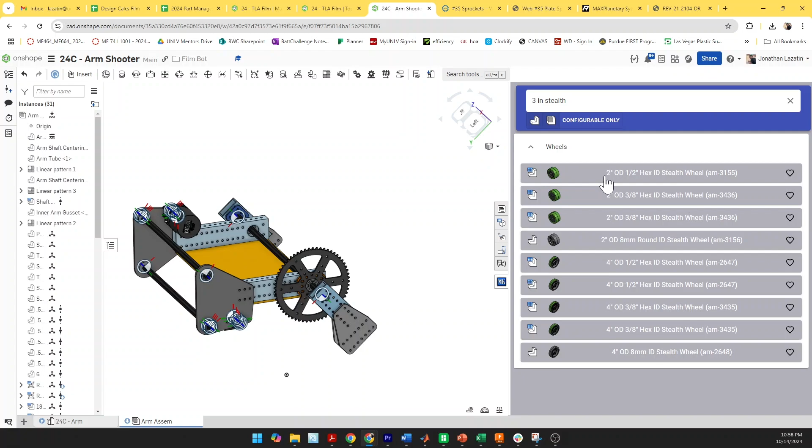Next, I'm going to include my wheel. So I'm just verifying the diameter is a 3-inch diameter wheel. And then I'm going to look for MKCAD 3-inch stealth wheels. Cool. And actually, there's 2-inch and 4-inch. I don't see a 3-inch here. And when I put 3-inch wheels, I actually only see these squishy wheels, which aren't great for shooting. So it looks like MKCAD doesn't have the 3-inch stealth wheel.

So let's go to AndyMark and see if they actually exist. I'm pretty sure they do. So I go to stealth wheels here, and then I look. It does have a 3-inch option, so that exists. They have it for a 1/2-inch hex and for blue, so the wheel does exist.

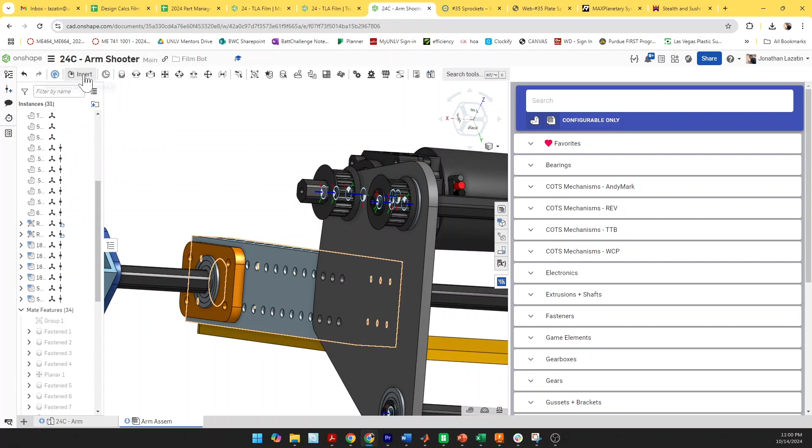So one thing I could do is I could download the step file here for the 3-inch wheels. Let's actually just check if there is one in the public library as well. So if I go to insert and I go to public, a bunch of files already exist here. I can see if there's a 3-inch stealth wheel that exists within Onshape already. So 2-inch, 2-inch, 2-inch, nope, 4-inch. I don't really see what I'm looking for here. Let's put quotations around 3-inch to only look for 3-inch. Does not look like it exists with stealth wheels.

So, okay, so now I'm gonna download this file, this 3-inch stealth wheels with 500 hex bore, so that 500 is 1/2 inch. Next, I'm going to close these, and then so there's no option to import from the insert folder or the insert part. So actually, what you do is you press the plus button and go to import here, and then you're going to search through your folders into my downloads, and then let's import it. I'm going to combine it into a single part studio, I think.

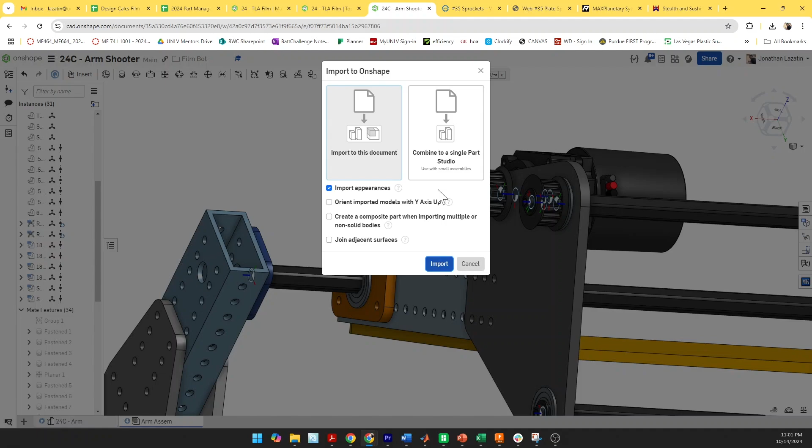So that's going to import into a part studio inside of your document. That new one opens up, and now I can insert that new part that just created itself in its part studio.

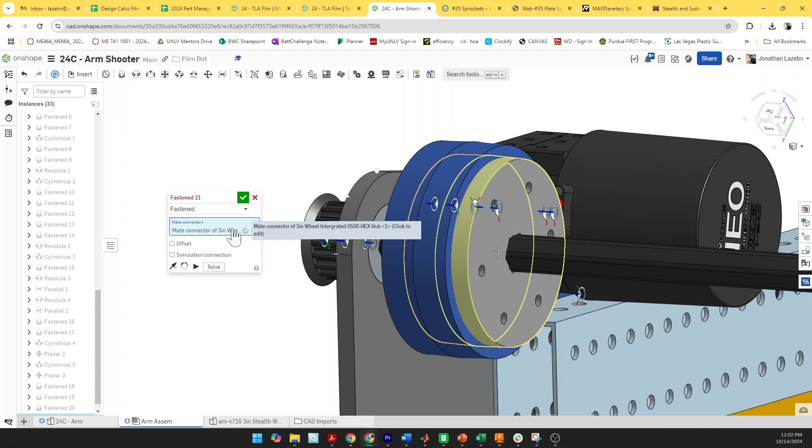So I'm going to mate this to my shooter inner circle. Okay, so now there are actually two parts, it seems. I'm going to offset this by 1 inch, negative 1 inch, to go away from the plate, and then do another mate from the circle, the blue part, to the gray inner hub. I must have clicked one of the wrong faces, might have done the center of the blue. Let's try that again. Close this guy out, close this guy out, and now this edge to this edge, and boom, cool, now they're mated.

All right, so now I'm going to do a linear pattern. I'm going to click the parts that I have here, linear pattern. I want the blue and the gray part, not the shaft, just the blue and gray part. I'm going to go in the direction of the shaft, and then let's do 2 inches. Oh, these are actually 1 inch wheels, so 1 inch. And then let's make that 3, give them some thickness. There we go. Cool.

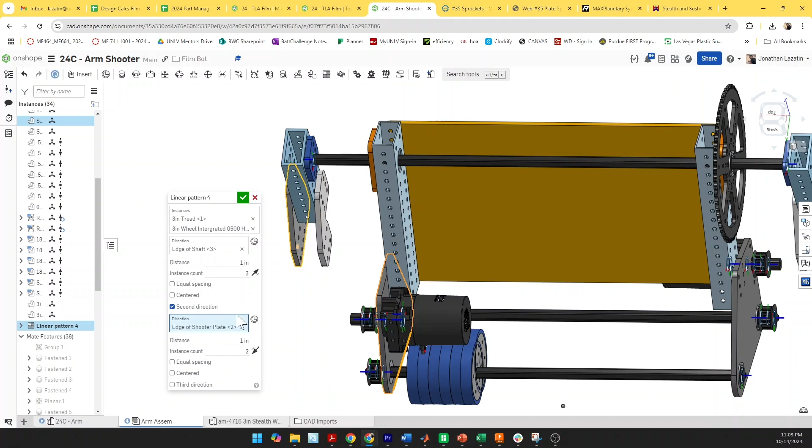And then I'm going to go in a second direction, in the direction of the shooter plate. Oh, it rotated. Let's try that again. Direction of the shooter plate. Oh, why is that rotating? That's weird.

But anyways, the distance I'm going to go is the distance from center to center, which is 4.9 here. So I'm going to go back to my linear pattern for that set of holes, the last one we did. I'm going to change the second distance to 4.9. And there it goes, okay cool. So yeah, it did it in the right direction, but for some reason it's like rotating every time I select something, which is not fun.

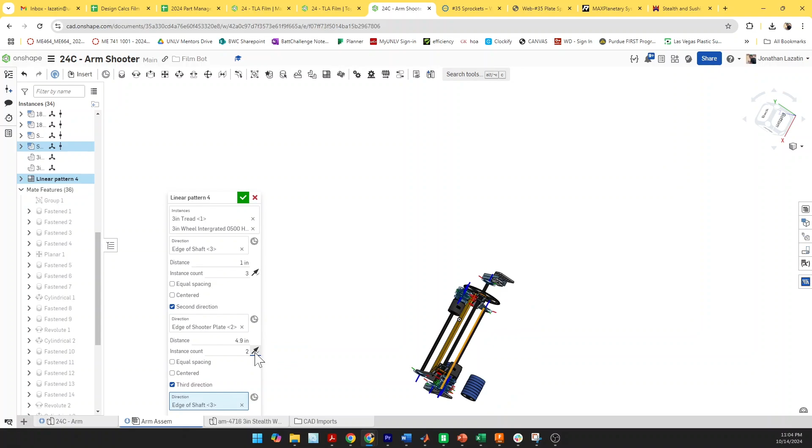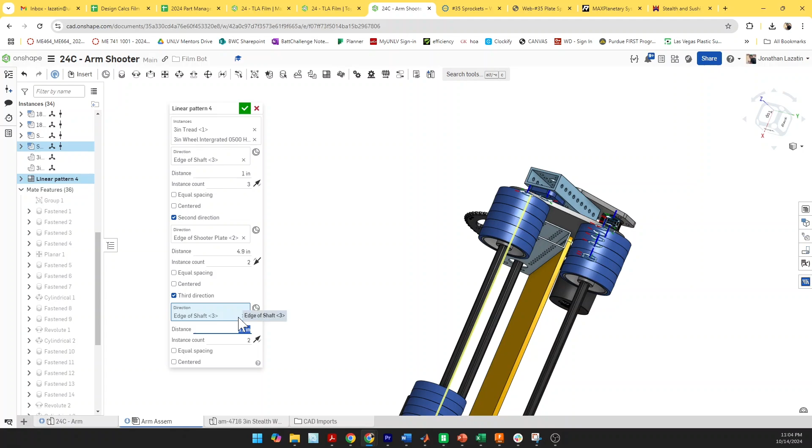Then I'm going to do a third direction, actually down the length of the shaft. Not this one, flip this back. In my third direction, we're going to go about... 14 is too much. It's going out the edge of the plate, so we'll back that off to 12, and that's at the very, very end of the plate, and we need to go another inch, so we'll do 11. Cool.

So this wheel set now should also be an inch away from the other side plate. So now we have all of our wheels in place.

And what would actually hold these wheels in place is we would put a shaft collar on the inside and a spacer on the side facing the shooter plate. Ooh, this is going to be annoying again. Okay, so I'm going to mate this shaft collar to the inside of this plate here. So that's what will retain the position of that shaft collar.

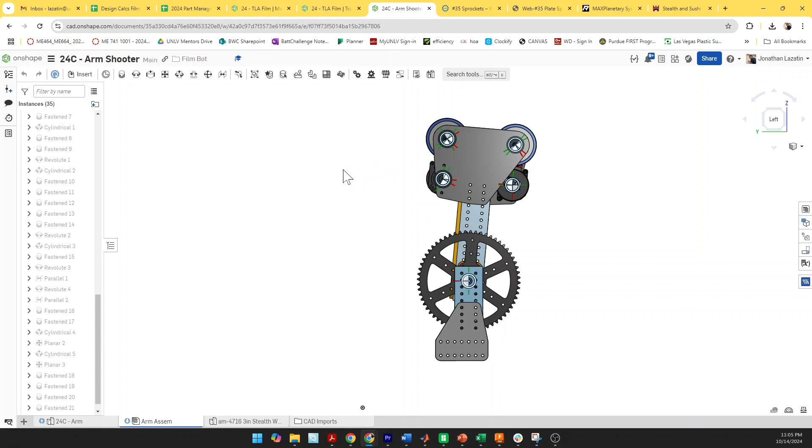And then I'm going to do another set of linear patterns. I'm going to fast forward this so it's not so much of a headache, but essentially I'm adjusting the dimensions of the linear pattern so that they hit all 4 insides of the wheels. So my final dimensions ended up being 4.9 from top to bottom wheel and then 7.5 for the inside. And I'm not going to model it here, but I would also have a 1 inch spacer from the shooter plate to the end of the wheel hubs to keep that in place. So I only need 4 shaft collars and 4 spacers.

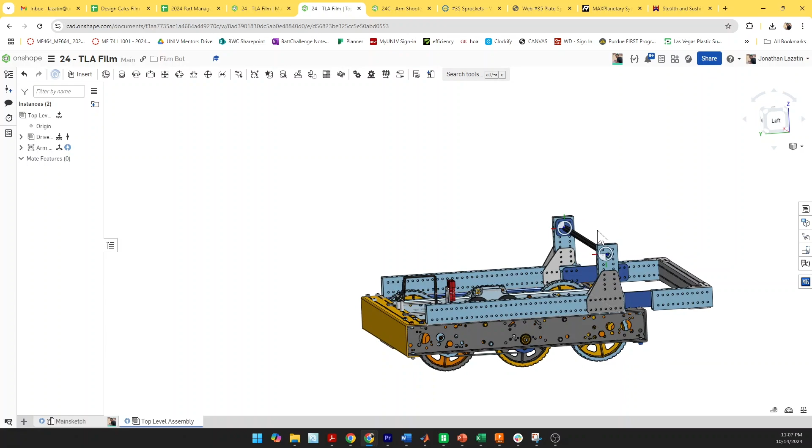Now I'm going to go back to my top level assembly. After I've created a new version of my shooter, I get a blue circle around my arm. I update that arm file, and then it should upload along with my shooter.

All right. Oh, and so it's not mated yet, so I need to fasten mate this last hole to this last hole, and then solve it, and get a green check mark on it. Now it's in place. I'm going to hide all the mate connectors so I could see my assembly clearer.

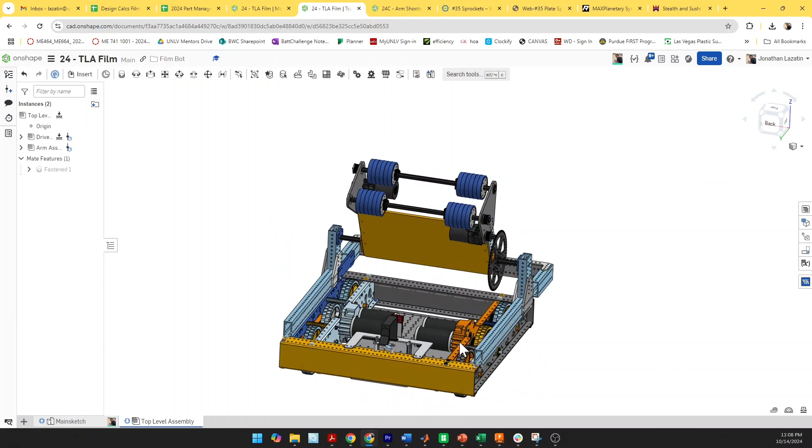But here is the shooter mounted on top of the drivetrain. The sprocket looks like it has some clearance from the drivetrain body, so that looks okay. Next, what I'm going to do is figure out where to mount a motor to rotate this, but for now, this is going to be it. So I have my shooter that's able to rotate within the frame perimeter of my drive.